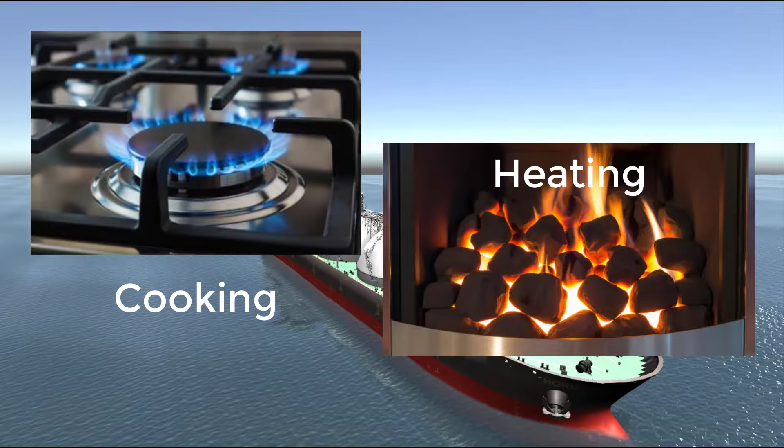Foremost, we know about petroleum gas and its usage is just a common thing, though the majority will only think of it as being used for cooking and heating, which is very true. But when we talk about how it's being transported, its usage or application in a broader view, then such curiosity may differ from one's interest. Of course, who cares anyway when you benefit from it?

It won't bother much except when your bills arrive after using it. Nevertheless, let's expound and explain it, and you may just wonder where it came from, how it's being transported, and finally, to know its major impact on our world's energy demand.

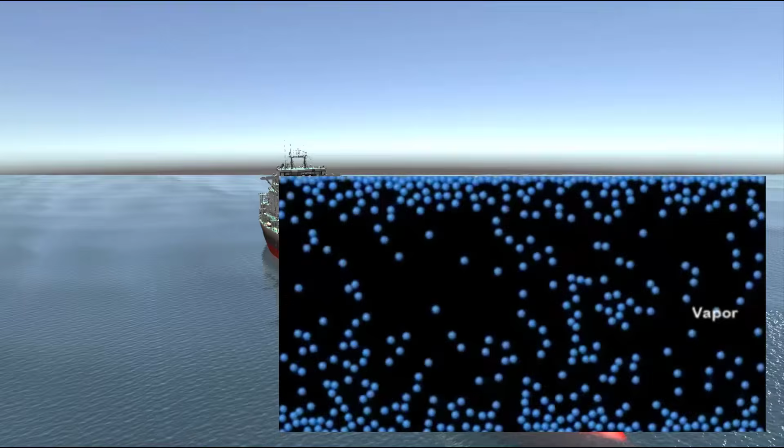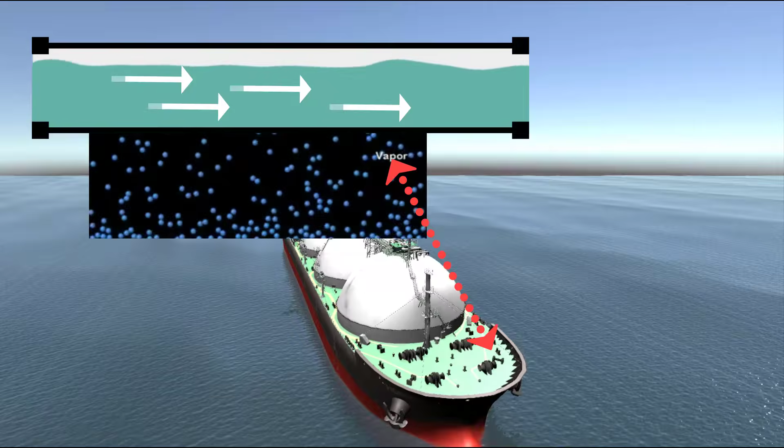To start with, gas carrier ships transport the bulk of these gases in liquid form. Yes, in a liquefied state, the obvious is clear. Most gases can be transported from their natural state in volumes to about 700 times less ratio when liquefied. This means it can be transported in huge amounts from one point to another, coast to coast, all through the world trading routes.

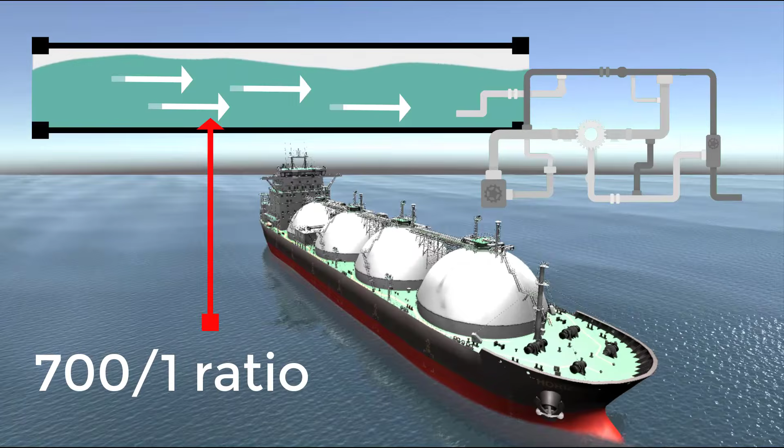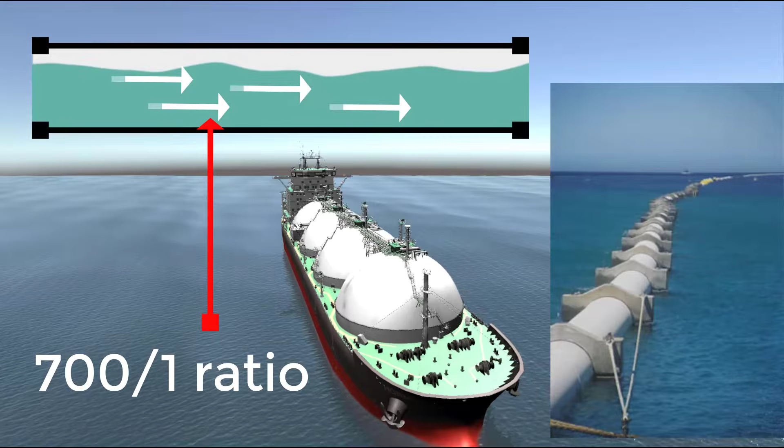The other means of transport will be carried through pipelines, inland or submerged under seawater marine pipes that cross distances. And thus, it's delivered into your homes or industrial entities for energy consumption.

The majority of these gases are byproducts extracted from fossil fuels. Yes, fossil fuels, mined beneath the Earth's surface, drilled or bored through inlands or seabed, where such precious commodity came into existence millions of years ago.

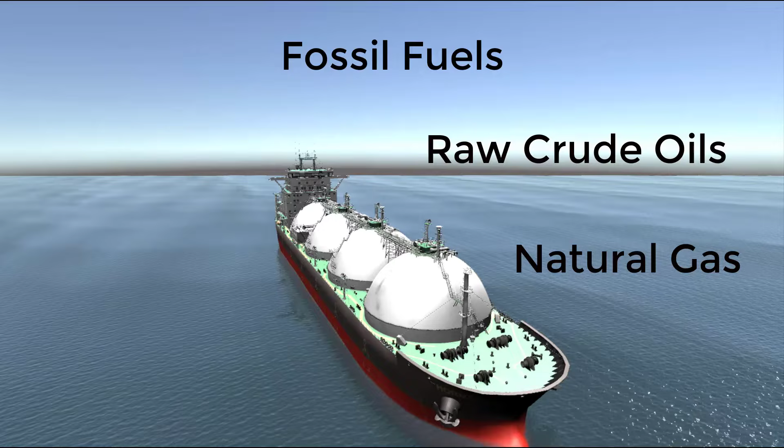We can term this as raw crude oils and natural gas trapped in a reservoir in different places around the globe. They go through a process we term as cracking, fractionation, and distillation in refineries close to major sources. Hence, the outcome yields different byproducts ranging to many types of petroleum oils, and petroleum and chemical gases.

Since we are focusing on gases, these are basically the lighter density yielded by the fossil fuel when refined. It becomes your propane, butane, ethane, and methane, where the latter comes directly from a natural gas reservoir.

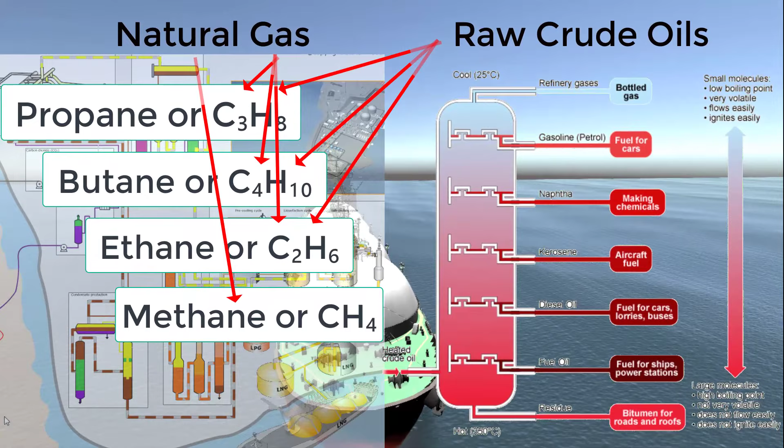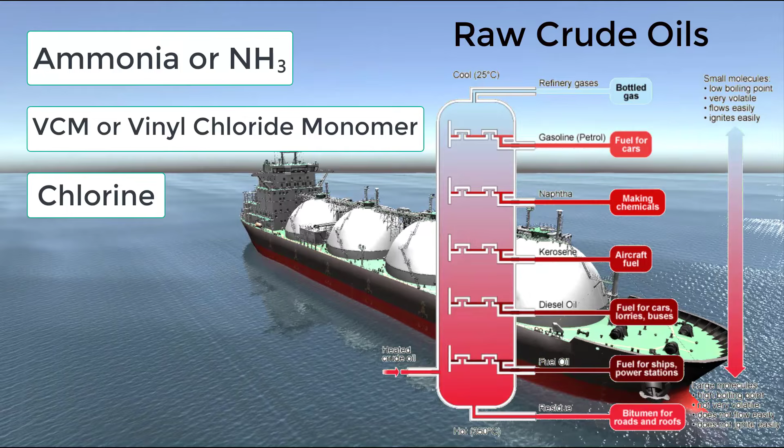The other byproducts are chemical gases, where they are cracked and mixed with other substances to form other petrochemical gases such as ammonia, VCM or vinyl chloride monomer, chlorine, amongst many others. This group also includes hydrocarbon gases such as ethylene, propylene, butylene, and butadiene.

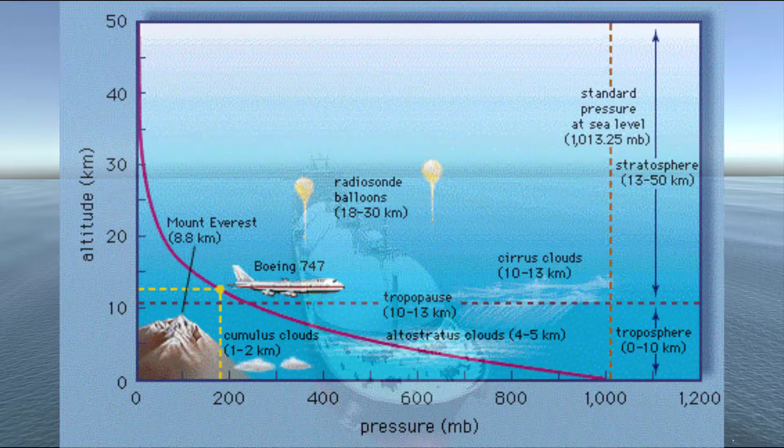Under normal atmospheric temperatures and pressures, all these compounds are gases. This is their very common property. However, they do differ in transportation and handling procedures because such compounds behave at different temperatures and pressures.

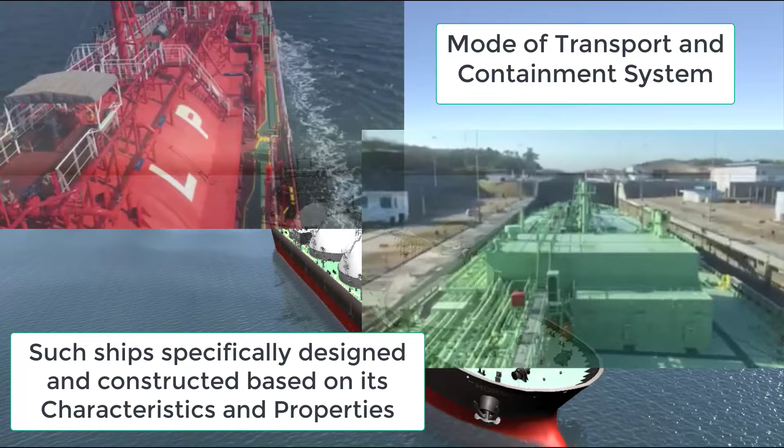Liquefied gas carriers use a variety of cargo containment systems. Depending on the characteristics and properties of such compounds, each has its own specialized containment designed specifically for it. This is determined by the temperature and pressure, once again, required by the cargo, and likewise the cost of shipbuilding to contain and sustain it.

Although these compounds are all gases by nature, the reactivity to both materials and with other substances like chemical gases will of course restrict the design for such carriage or transportation. To give you a better view on how you may see or observe in layman's understanding, let me show you a graph of the physical and thermodynamic properties, and let's get down into details.

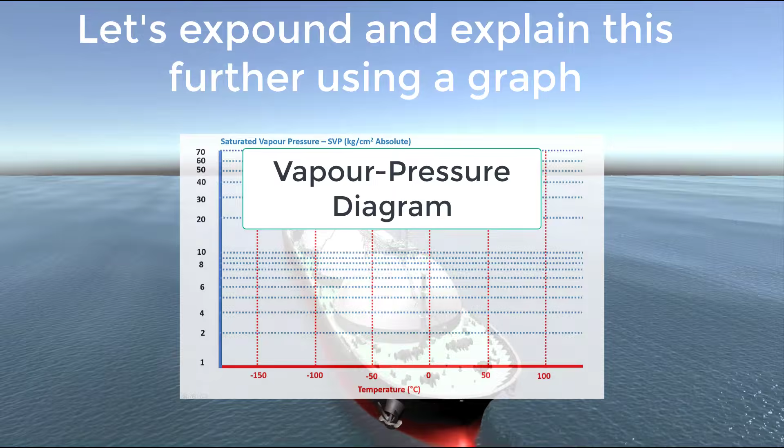As shown in this graph, commonly called a vapor pressure diagram, the vertical baseline on the left represents the pressure, with a corresponding value in a perpendicular line color-coded blue. The horizontal baseline is the temperature in degrees Celsius, corresponding to the perpendicular vertical line color-coded red.

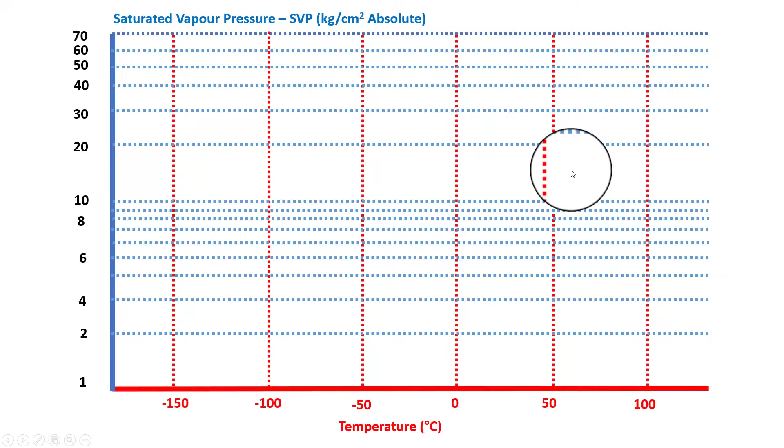For the purpose of this discussion, we shall use the unit of measurement as kilogram per centimeter square, or its equivalent in bar pressure or normal atmospheric pressure. For convenience, this is generally expressed as the saturated vapor pressure, or SVP, in a non-linear scale.

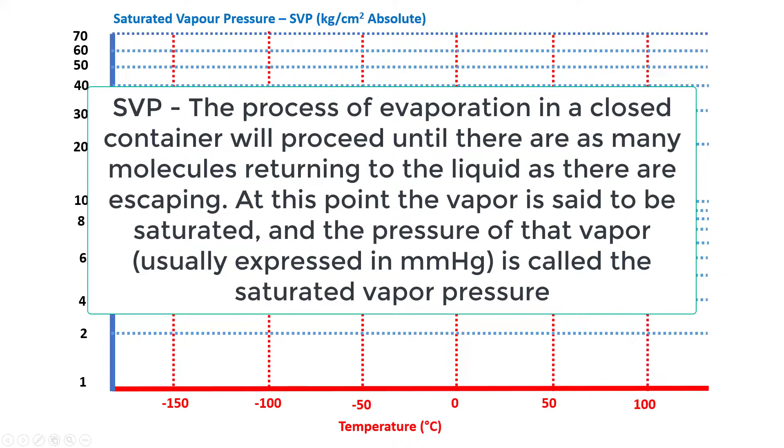We see here the types of gases mentioned earlier. Each gas has its own individual curve on the graph. Its SVP, or saturated vapor pressure, is the pressure exerted by the boiling liquid vapor of the gas within a closed container at a given temperature—the condition when the gas becomes a liquid and the liquid can become a gas.

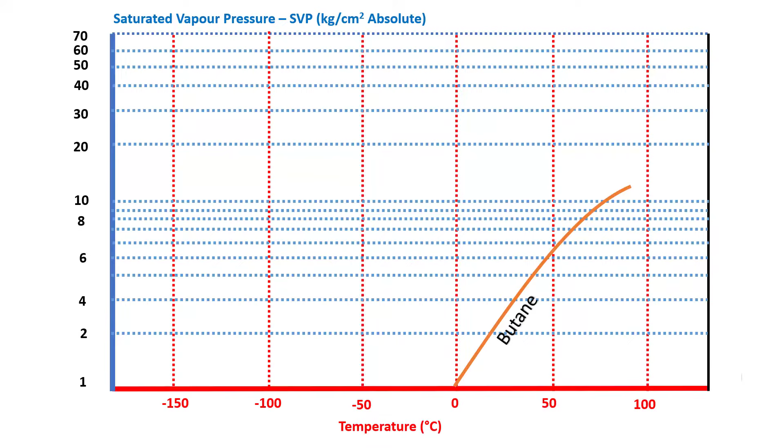Now let's take a look at this example, the curve for butane. Under conditions to the left of the curve, butane is a liquid, and to the right, it is a gas. Hence, at 0 degrees Celsius at 1 bar, butane is a gas.

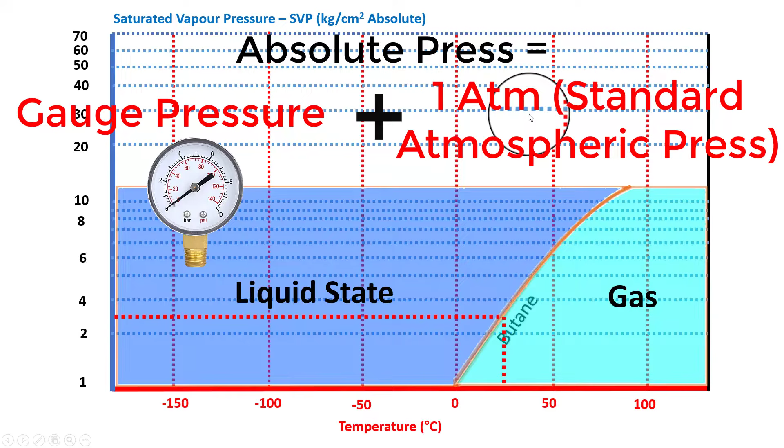1 bar absolute is the equivalent of 0 gauge pressure. If we go up the curve, we can see that a pressure of 3 bar is enough to keep it a liquid at temperatures of up to 30 degrees Celsius.

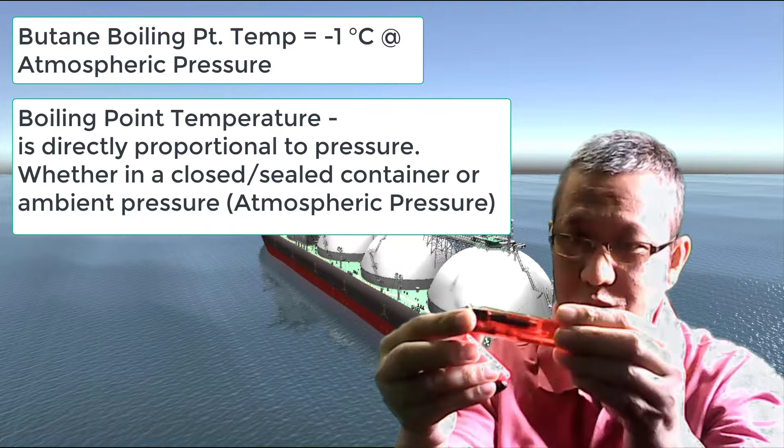To demonstrate, let me show you an easier explanation using this cigarette lighter. It has butane inside, sealed in a plastic disposable container. The gas itself has a boiling point temperature of -1 degree Celsius, but since it has been contained in a pressurized containment, by the law of thermodynamics, boiling point temperature is directly proportional to pressure.

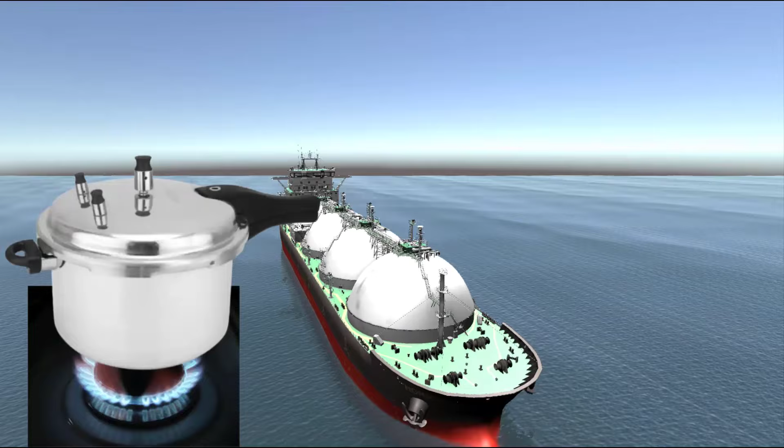The same will happen when you are cooking with a pressure cooker in your household. The boiling point of water becomes higher than 100 degrees Celsius, whilst in an open container lid, it boils at 100 degrees Celsius under normal atmospheric pressure.

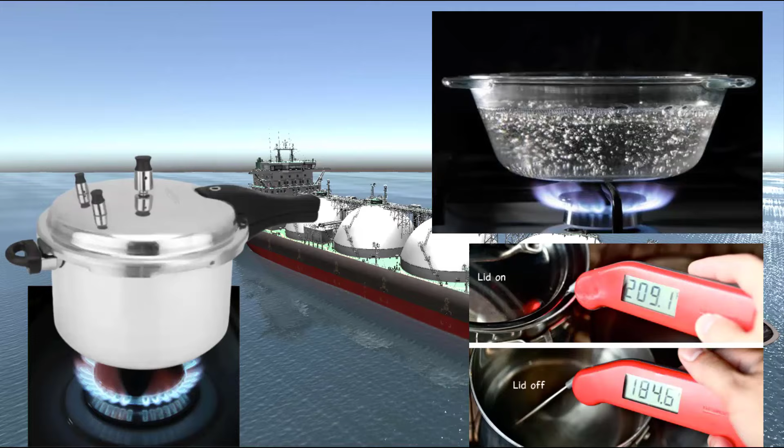So as you can see, the ambient temperature and atmospheric pressure will determine its behavior within its containment. The liquid butane will be subjected to the ambient temperature and pressure. Thus, the vapor will become equal to ambient temperature.

It will stop evaporating, or the liquid will stop boiling off, once the vapor equalizes with the molecules that try to escape against the molecules that turn back to liquid. At this stage, we call this the saturated vapor pressure.

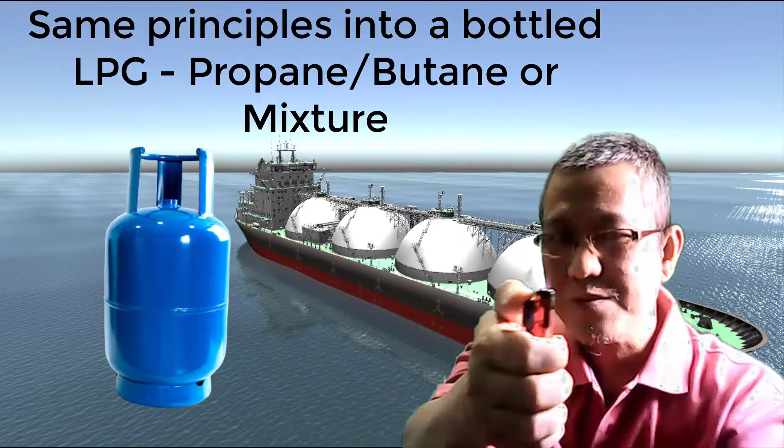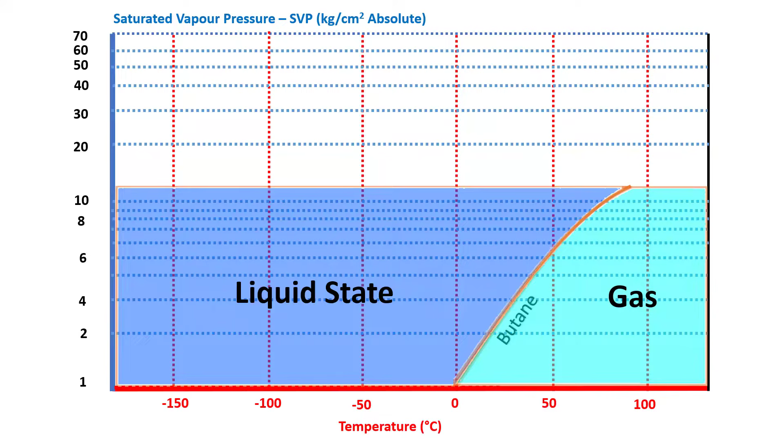If we release the pressure, the gas will start to go out, and hence the liquid starts to boil off again, as demonstrated in this segment. Basically, this is exactly what happens, represented by the graph. As shown, the pressure drops and the liquid boils and yields gas or vapor.

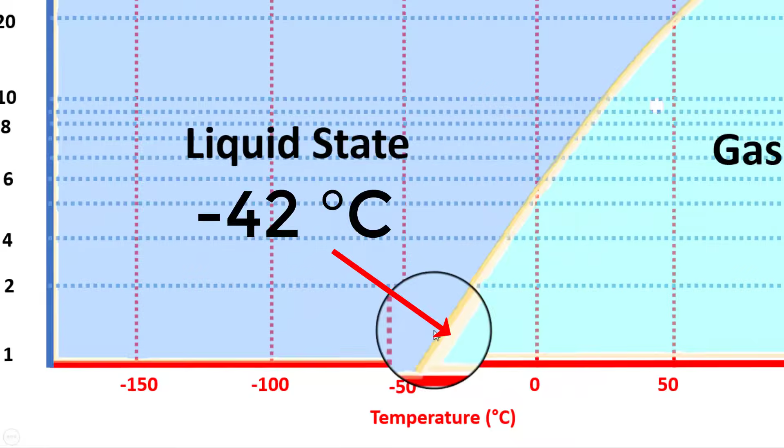This is the same property or behavior you will find with propane, as shown in this graph. We see that in theory, it could be carried at atmospheric pressure if kept below -42 degrees Celsius, or it could be carried at temperatures up to +40 degrees Celsius if contained in a pressurized vessel, kept at a pressure of 10 bar or more.

However, a gas like methane, which is natural gas, will always need to be refrigerated, as even at 40 bar pressure, it must be kept below -80 degrees Celsius to remain a liquid.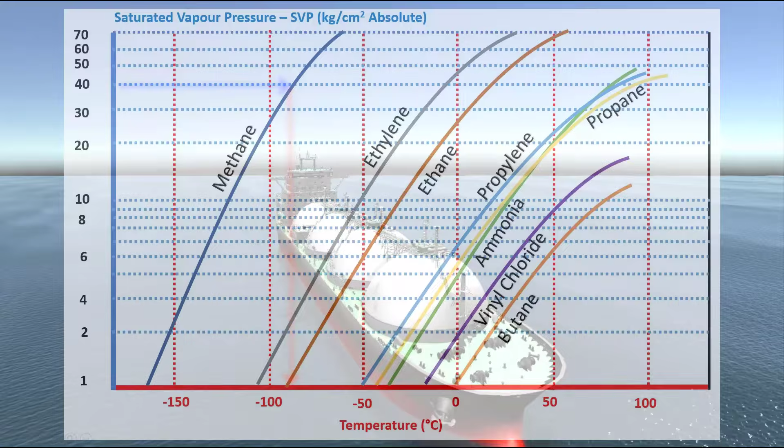Although at present times, we now have technology to contain them without refrigeration by using CNG, or compressed natural gas. However, in this condition, methane remains as a gas and is transported as a gas but not in liquefied form. This is now applicable to some transportation vehicles where methane is used as a fuel for their engine.

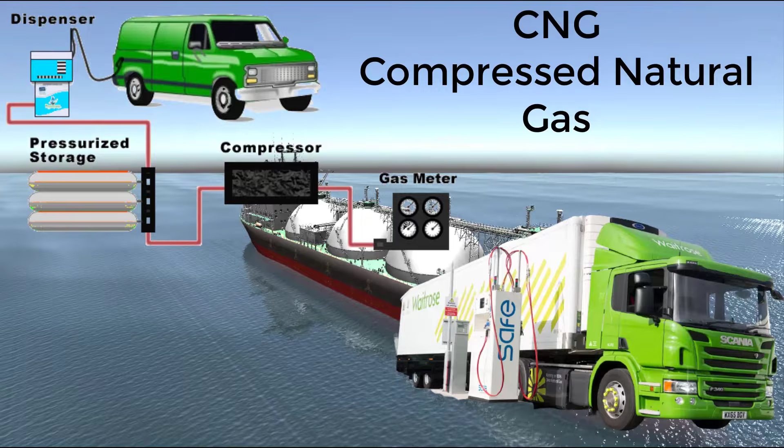Sometimes a mixture of gases is carried. The saturated vapor pressure of the mixture will depend on the proportion of the two gases in it. Mixtures of gases, provided they are both saturated hydrocarbons, for example propane and butane, or ethane and methane - the curve will lie somewhere between those of the separate gases.

Other gases may not be mixed since some of them are unsaturated hydrocarbons, meaning their molecular components are unstable. For example, ethylene cannot be mixed with methane - a chemical reaction will occur and a hazardous situation may result.

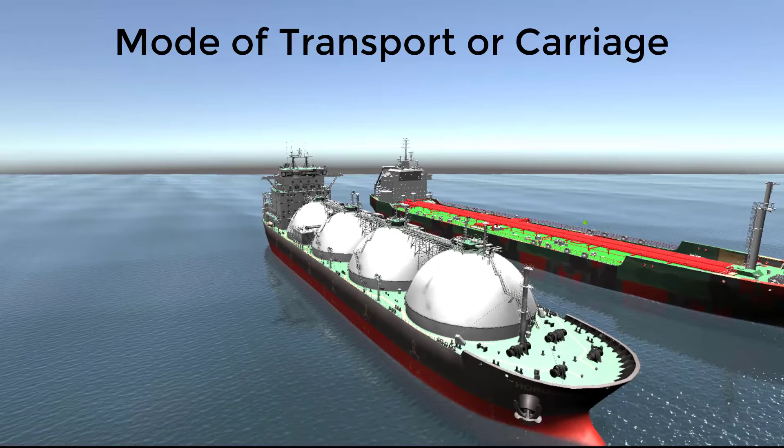Now let's talk about how they are transported: in what condition, type of containment, and what building materials are used.

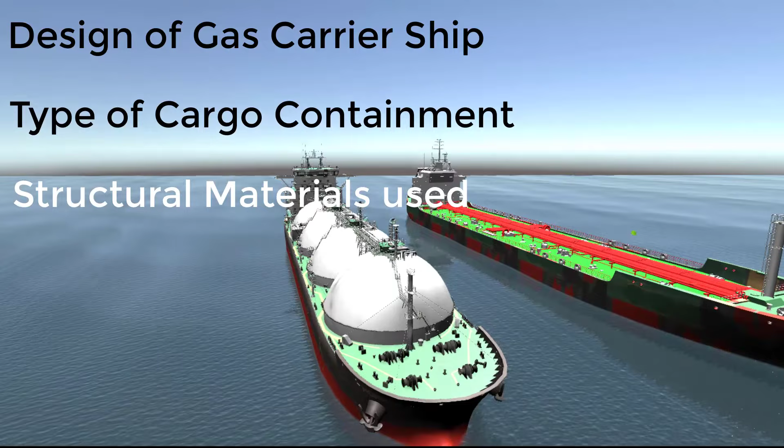Gas carrier ships evolved originally from oil tankers, but differ a lot in design and cargo operational procedure. In oil tankers, the cargo tanks are mostly an integral part of the ship's hull, while in gas tankers, the cargo tanks are always separate, independent structures. In short, the containment or cargo tanks are structures within or inside another hull.

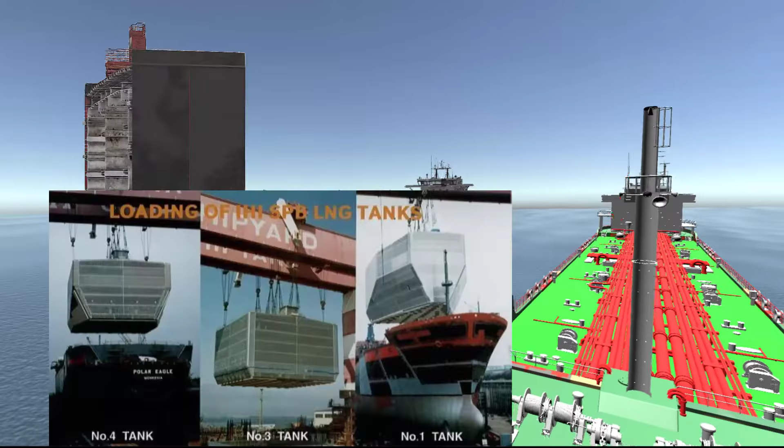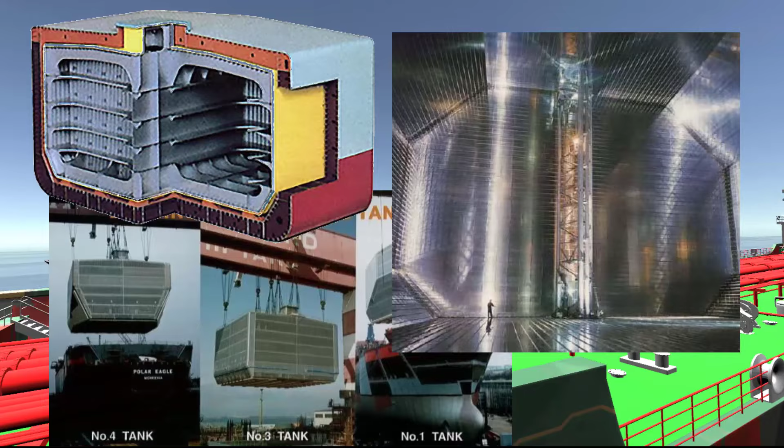Let's just say a tank inside a tank. As seen in the comparison image displayed, the ship's hull and most of its structure are built up in one place, such as a shipyard, while the cargo tanks are separately built based on the type of cargo. They are then incorporated, put in place, or loaded as a whole, assembled within another hold or void space while the ship is being constructed in the shipyard.

Such design must conform with gas codes, the so-called IGC, International Gas Carrier Code, developed by IMO, the International Maritime Organization. These are carefully laid out in detail, as with any other ship, but most of all are determined to meet the specifications required for such cargoes.

Containment systems are tested with great importance to make sure they can withstand large thermal stresses provoked by cooling down, loading in preparation for dry dock, gassing up, inerting, warming up for gas freeing, and many other cycles of operation on board gas carrier ships.

So the question arises, how are they being transported based on their behavior, characteristics, and properties? By standards, there are three major modes of transporting condition depending on the cargo.

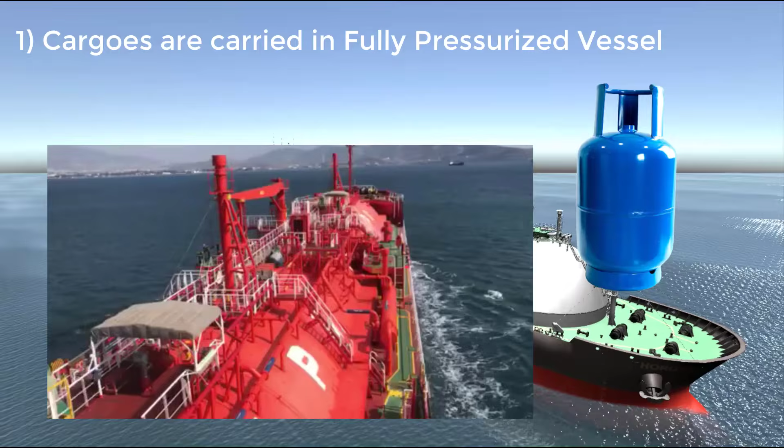Number one, cargoes are carried in fully pressurized vessels, just like your LPG bottle tanks at home, but bigger in size and floating in the sea. Number two, cargoes are transported in a semi-pressurized and semi-refrigerated vessel. Number three, cargoes are transported in a fully refrigerated vessel.

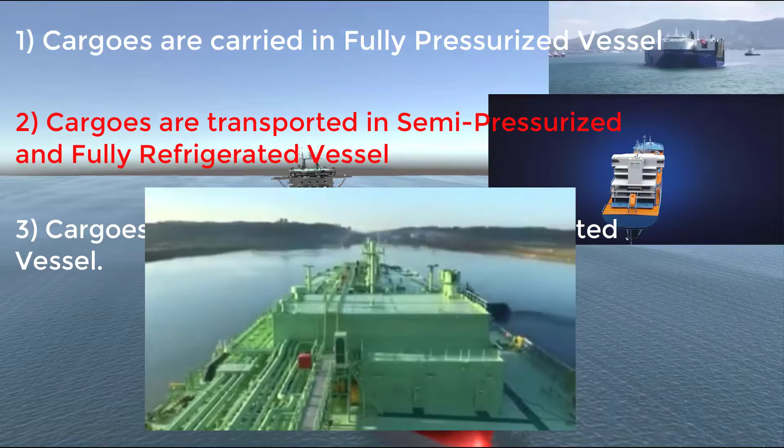For liquefied petroleum gases or LPGs, item number one is most applicable for usual propane and butane or a mixture of both. However, this ship has trading routes close to the shore or coastline, short distances, and less capacity to carry. Item number two is utilized for cargoes with higher pressure and lower temperature, such as ethylene. These cargoes should be contained in a semi and robust pressure vessel, but capable of reliquefying the liquid back.

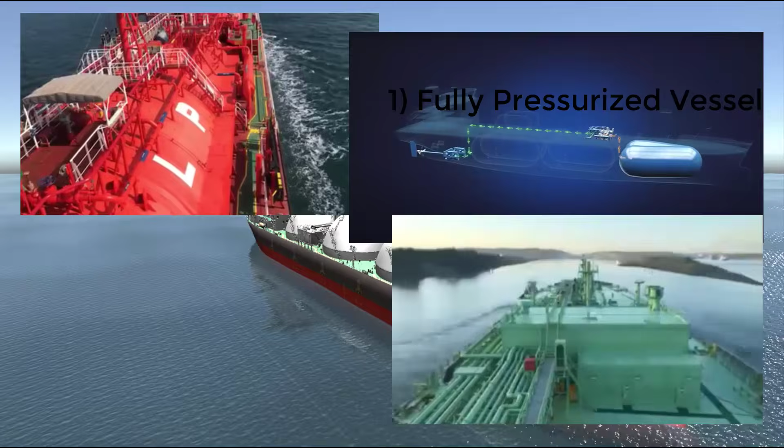Hence the so-called fully refrigerated type is applied, where the pressure is basically close to zero gauge pressure or atmospheric pressure. Type number three is fully refrigerated, basically the same principle as item two but at less pressure. This is the same cargo as item one, except it carries a larger quantity. Tanks are bigger because they do not need to be fully pressurized. In short, the steel tank thickness is thinner but bigger, allowing a bigger vessel, and it carries cargo at atmospheric pressure.

For liquefied natural gases or LNGs, item number three applies. Nowadays both are carried typically with a reliquefaction system. Hence the vapor can be extracted from the tank top, goes through the liquefaction system, and is injected back into the tank in a cycle. While in the typical or original type, the boil-off gas is released and diverted to the engine room to be utilized as engine fuel.

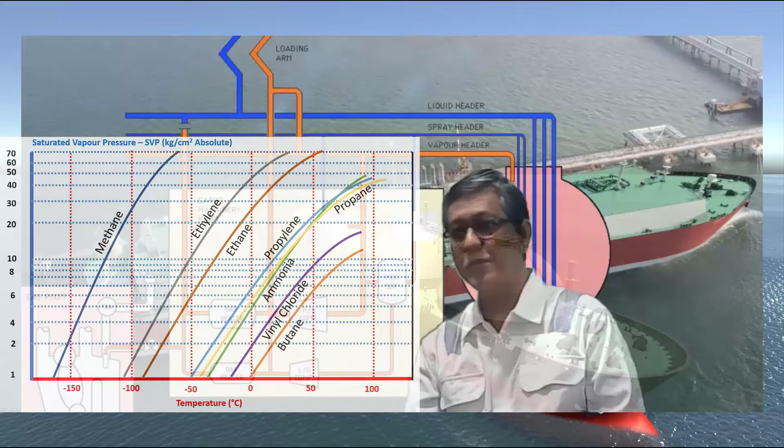So if we look back at the diagram shown earlier, we are basically bringing down the pressure, and hence the boiling point of such cargo also goes down. Thus it remains as liquid, less than the vapor that was utilized for the engine fuel.

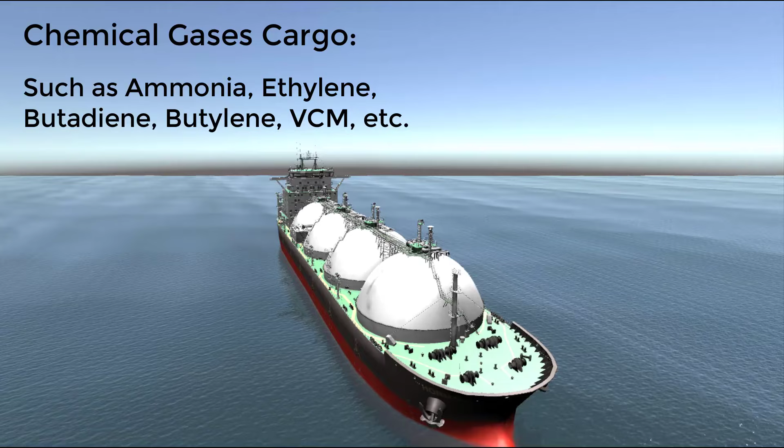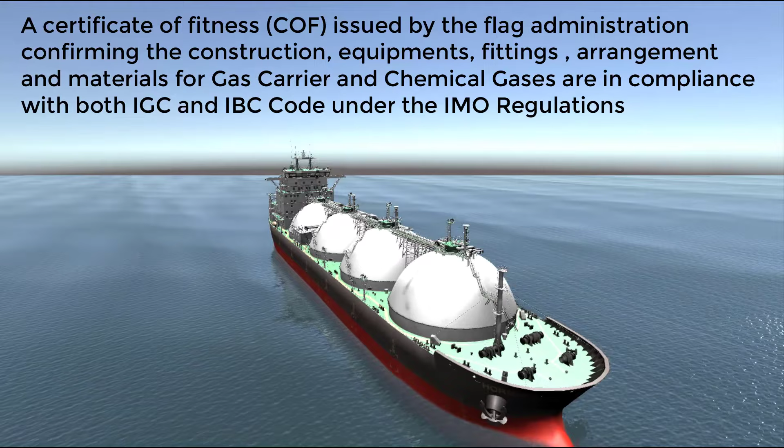For chemical gases, all items one, two, and three in the mode of carriage can be used. However, the materials or containment may vary in terms of chemical reaction or reactivity to the material or structures. In general, the type of cargo will be stipulated in the Certificate of Fitness or COF, meaning most ships specifically designed for such cargo won't likely be able to load any cargo they want. So basically they are intended for what they are designed for.

Let me tell you about a typical type of ship for LNG with a spherical type of containment, followed by a brief description of the category of carriage and containment type.

Let's tour you with the so-called LNG spherical type B ship. As you can see here, we have four tanks. They can basically be fitted with four or five tanks. For comparison, I have also included an oil tanker vessel beside it. Now the sizes are not necessarily to be compared — some are bigger, for example a very large crude carrier could be bigger than the spherical type. In this case, they are basically almost the same. So anyway, with no further ado, let's start.

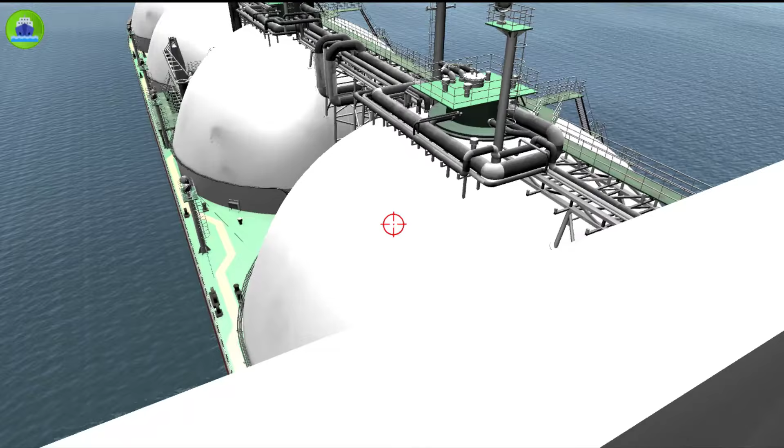As you can see, I am on the bridge looking down below through the cargo tanks. So I'm just going to go down — let's go down the stairs.

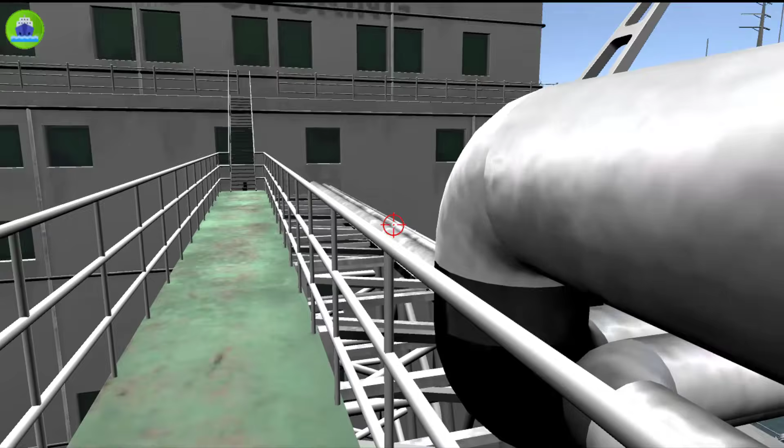Right, so basically we are now on top of the spherical tank containment system, and you could see the pipes. This pipe goes all the way to the engine room — this is the one I was talking about a while ago.

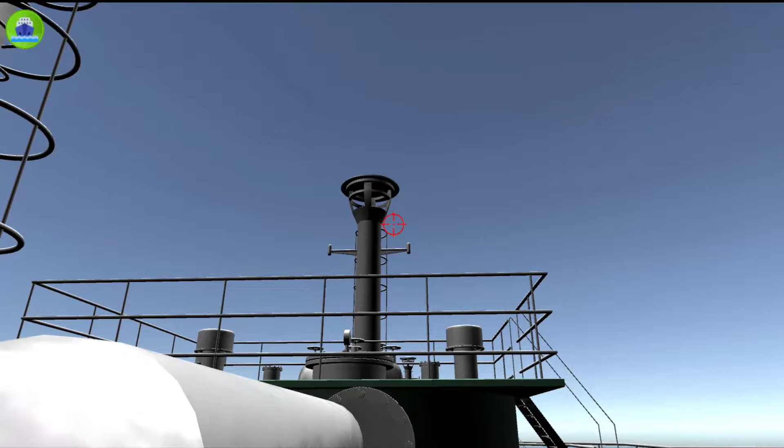If the vessel is not fitted with a liquefaction plant system, then the vapor that boils off from the tanks cannot be reliquefied and injected or condensed back into the same tank. So what happens is that instead of releasing them through the vent mast, which is of course a precious cargo, they utilize it as fuel for the engine of the ship. The engine is a dual fuel engine, so it can run on diesel, bunker, and also natural gas. So typically this is the first type of model or vessel of LNG carriers from the early days.

As you can see, we are just almost in the middle. Let's go down.

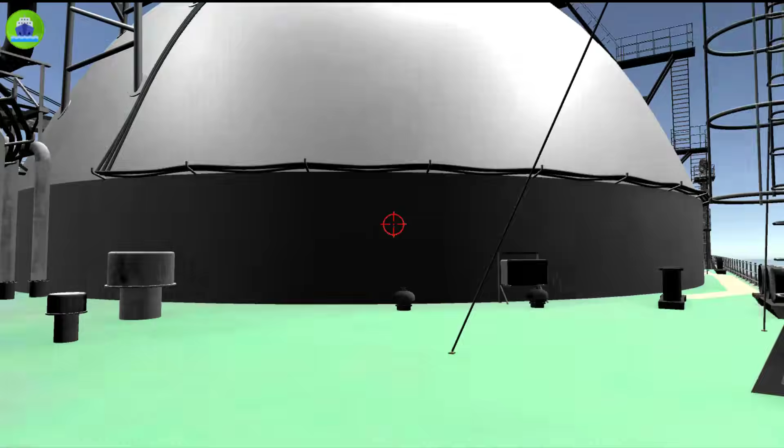Right, so this is really a very large containment tank, and it can carry about more than 135,000 cubic meters of liquefied natural gas. So it's really huge and big.

That's the manifold area, where the manifold arms connect when loading or discharging. So they are connected in these areas.

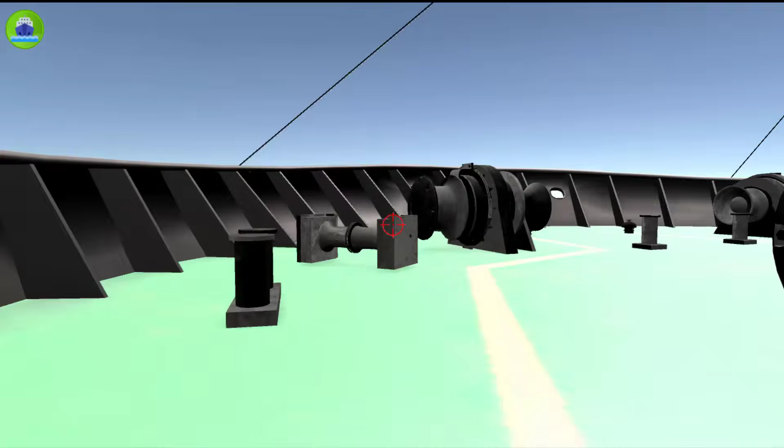Right, so this is just a brief tour. Let's run a little bit so you can see what's in the forward part. Of course, there are winches, anchors, windlasses, and other equipment like Panama leads, which are for the mooring equipment, etc.

Now, as you can see, compared to the oil tanker, it's pretty spacious, and there isn't much pipe, because on gas carriers all pipes should actually be above deck. Unlike oil tankers like this one, some pipes can even run all through the tanks, passing through some tanks, like for example on a very large crude carrier. Of course, some tanks don't have that kind of design or fitting, where they have individual pipes for each tank, especially for chemical tankers.

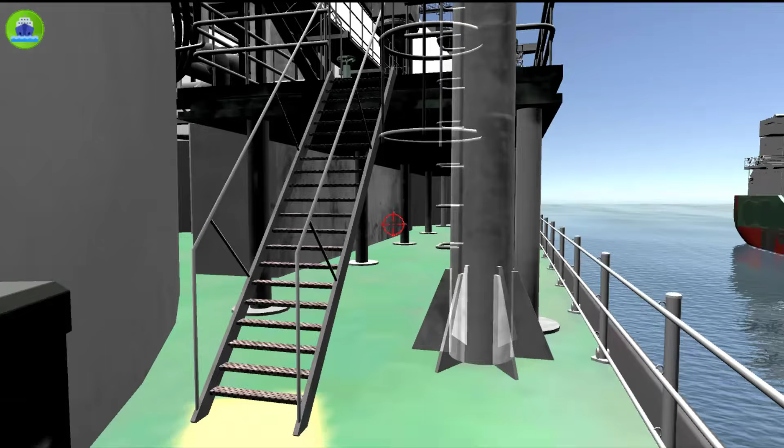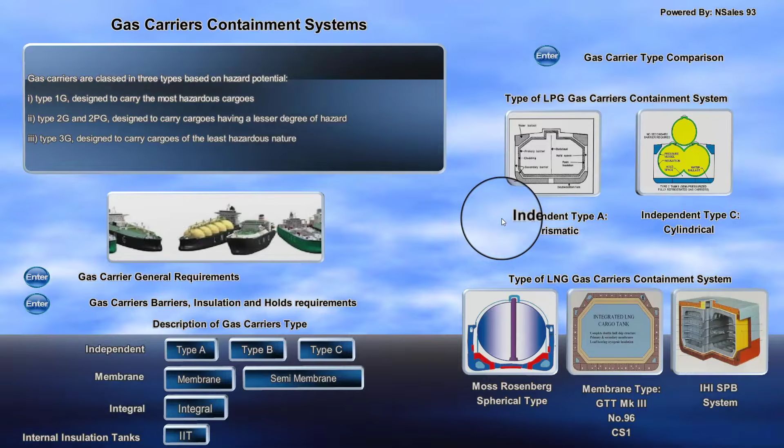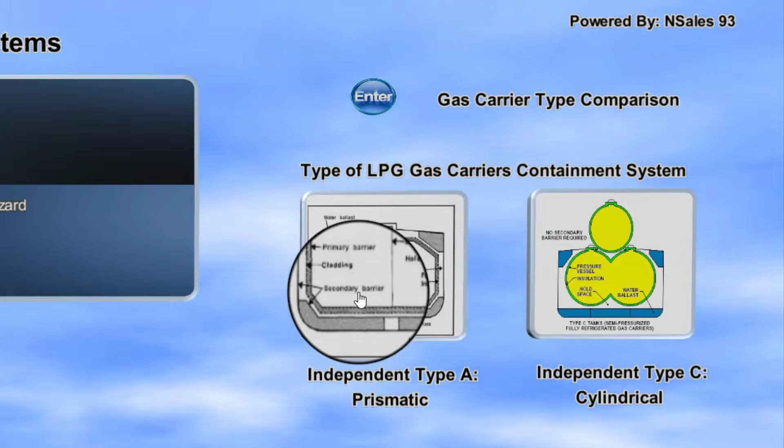So this is the spherical type, and I'm going to show you the rest of the containment systems of LNGs. These are the different gas carrier containment systems. As you can see, we have the three major types of LNG carriers nowadays: the spherical type, the membrane type, and also the IHI type. For LPG gas carriers, we have the so-called independent type A, which is prismatic, and the independent type C, which is cylindrical. So to give you an overview, it looks like this on the inside.

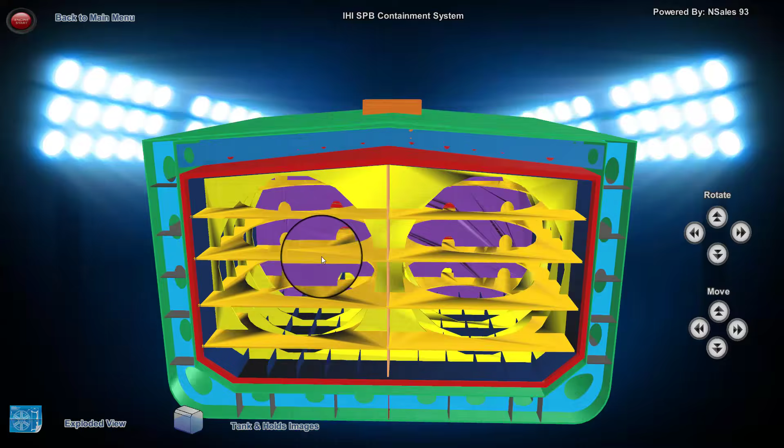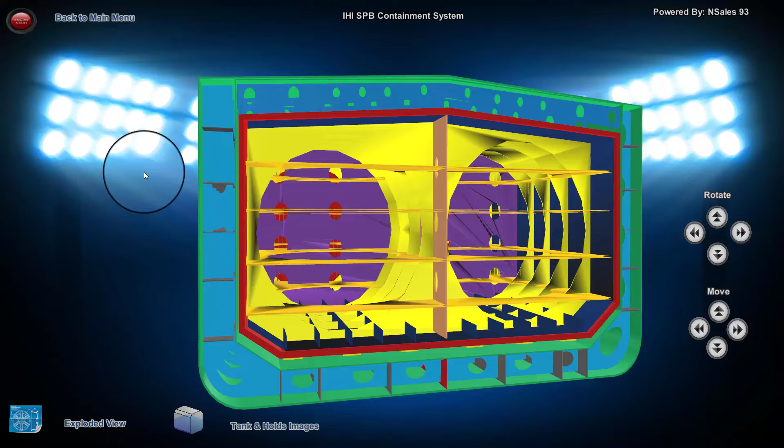Right, of course we also have the not so popular but very efficient SPB. As you can see, it has a bulkhead, which means it has less stresses, and at the same time, when it comes to the so-called sloshing of cargo, it will be lessened because it has a bulkhead, and it also further minimizes the effect of the free surface effect, as we call it, which basically adds up to a so-called negative GM. As you can see, they are loaded as a whole while the ship is being built.

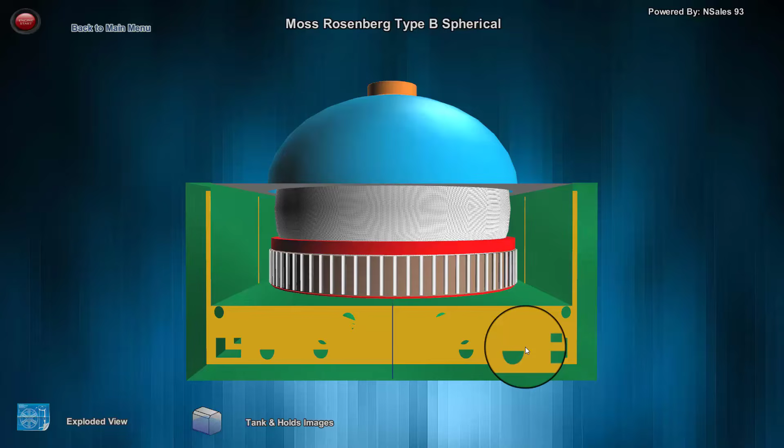And of course we have the spherical, or Moss Rosenberg type. It looks like this on the inside, and there you go. That's the one I gave you a tour of a while ago. So that's inside the tank actually.

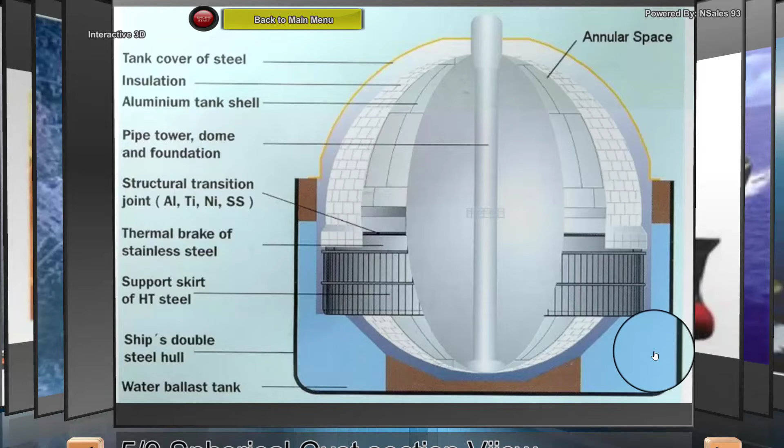First you have the cover steel and the large dome that you've seen, and then inside are the insulations and aluminum tank shells, and then your primary containment is steel or aluminum inside. And the sides, of course, are your ballast tanks, where you carry your ballast, as I've shown earlier. And here's another picture, that's inside the spherical tank.

So yes, they are categorized as independent, which they call type A, type B, type C, while the others, the most popular, are membrane types, which are of course the GTT Mark III, Number 96, and CS1, and also the type B spherical type, the most common, and the majority of LNG carriers used in the present day.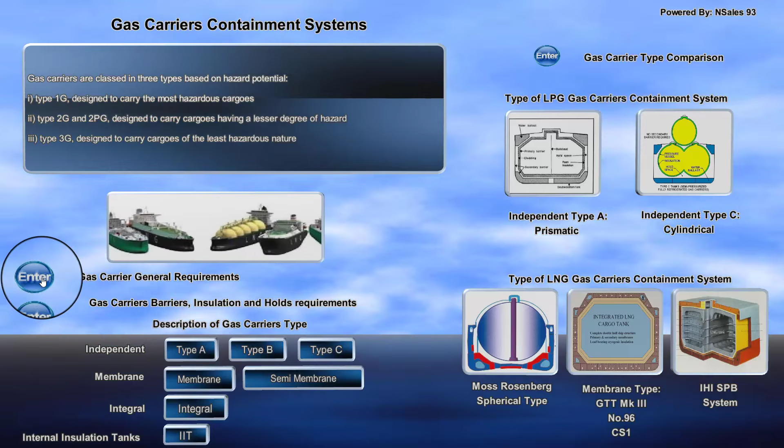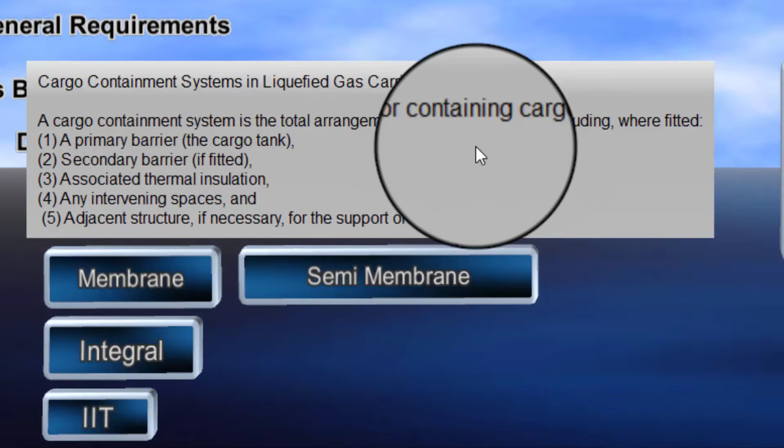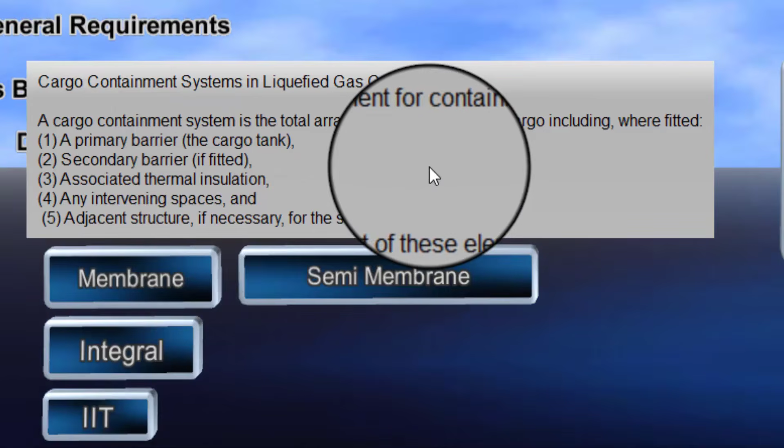They do have different requirements, but in most cases they have a general requirement: each of them has a containment capable of containing the total arrangement for cargo, including where a primary barrier is fitted, a secondary barrier also, and then associated thermal insulations, and also intervening spaces and adjacent structure to support the elements.

Anyway, just to sum it up, this is the kind of cargo containment of a gas carrier.